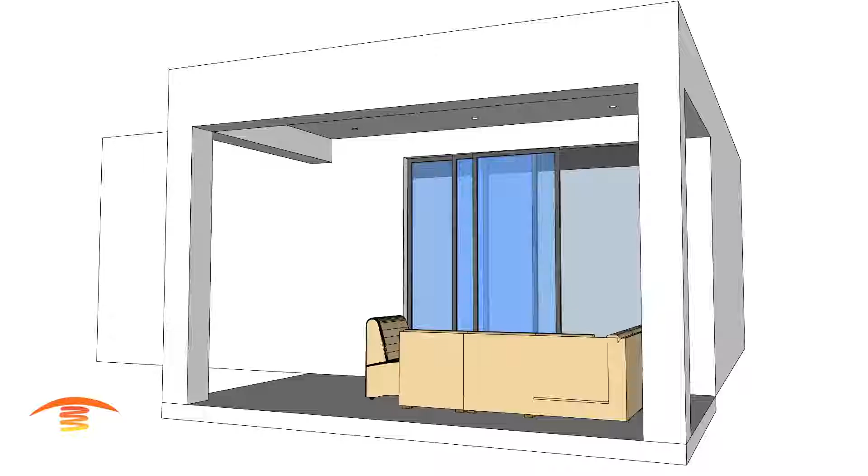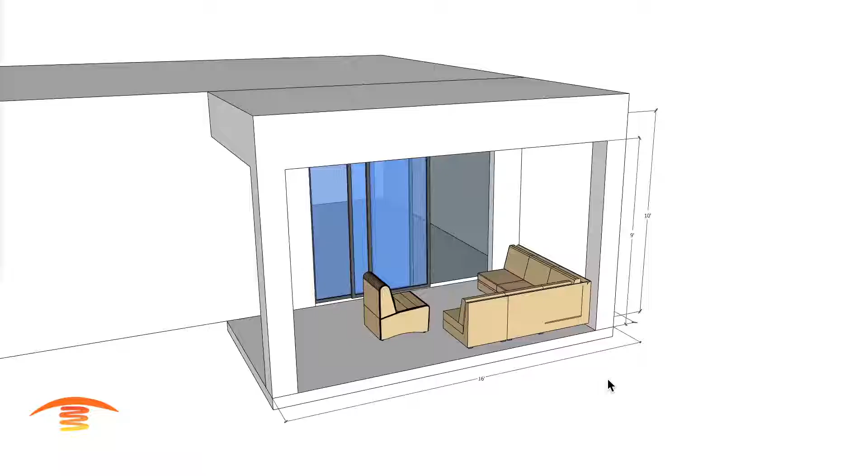Here we have a residential application. So this application, we're going to go ahead and look at the dimensions real quickly. And so I have a 10-foot ceiling height inside here, 9-foot edges over here. Total distance outside edge to outside edge is 16 feet by 8 feet 6 inches from the wall to the outside edge over here. And I think that's about it.

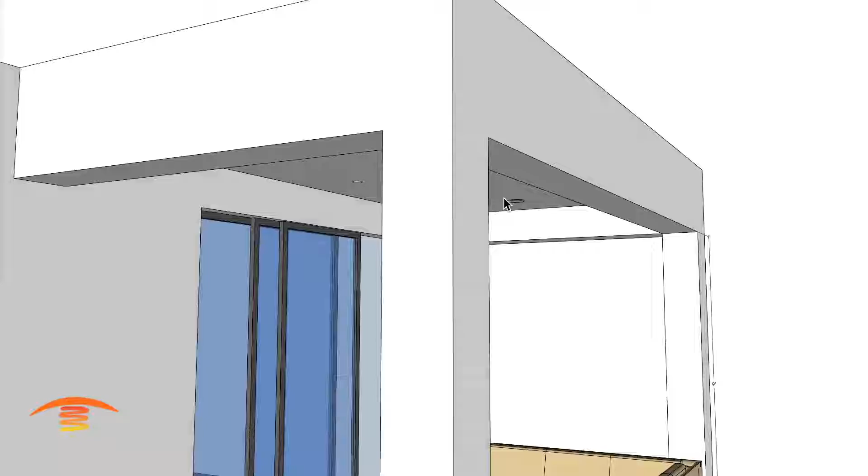We do have some can lights up here and some speakers that we want to be aware of. Also, the customer stated that they potentially might place a fan in here in the center. There is an outlet there for it already. And then of course we have sliding doors here. So let's just go here and look what that looks like here.

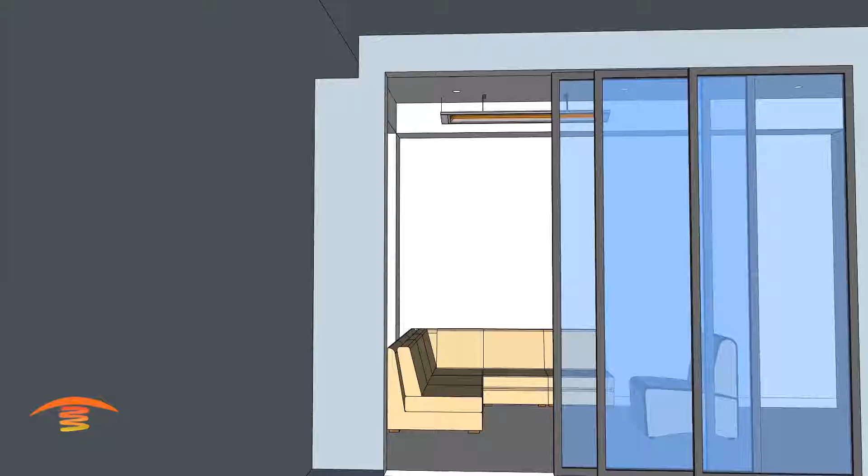So I just want to kind of throw this out real quickly, and here's one viewpoint of 2 units, and here would be a viewpoint of 1 single unit. And we'll talk about those in just a second. So let's go over here.

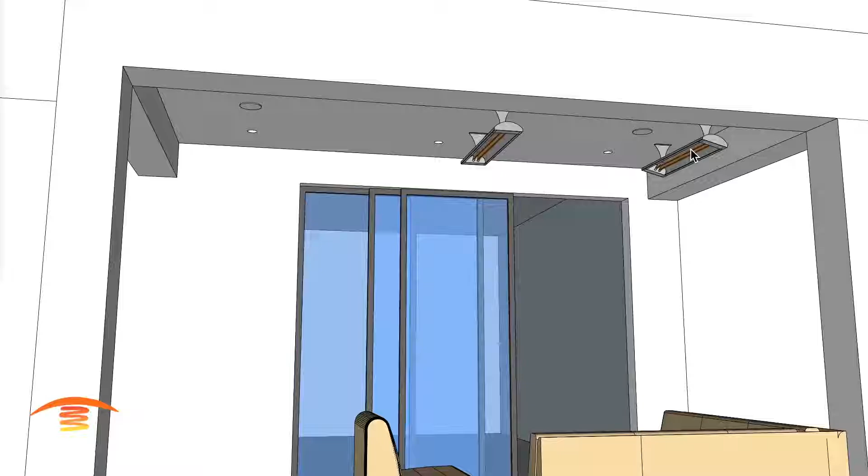All right, so first option I would recommend, and I know this isn't uniform, and that would eliminate the use of a fan in the center here as well. But these are the CD4024s, 4,000 watt 240 volt units. And the reason I have this is because I kind of like the way that this footprint of heat penetrates the seating area. It just has a more even flow throughout the space.

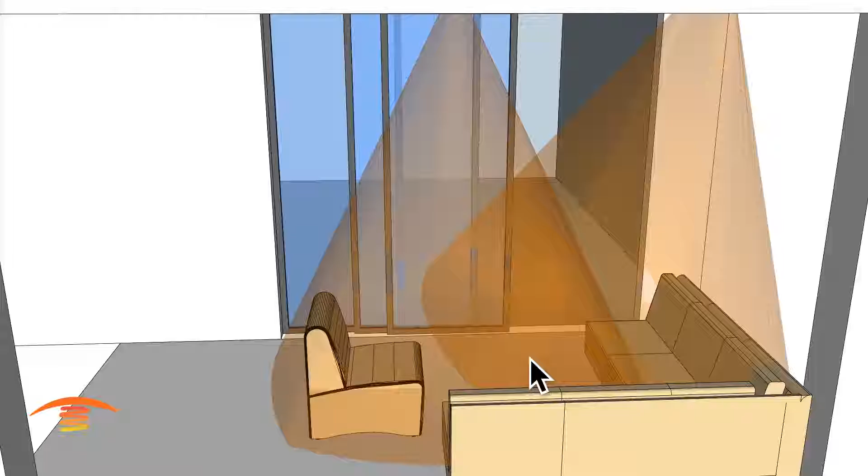Now I know that the customer, they also have a table here in the center, and we don't need to overheat that table obviously, but this just gives a better, more uniform heat throughout the space. Now, they did mention that they are the type of clients that would probably not need a whole lot of heat. So these could be reduced to a smaller unit.

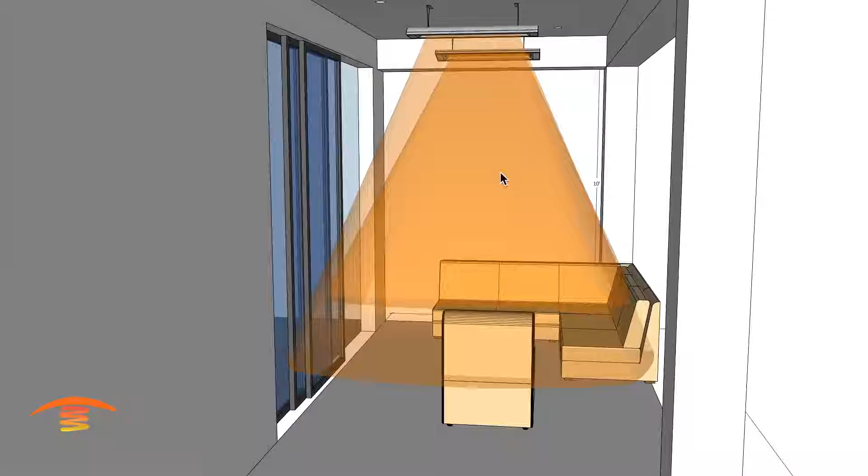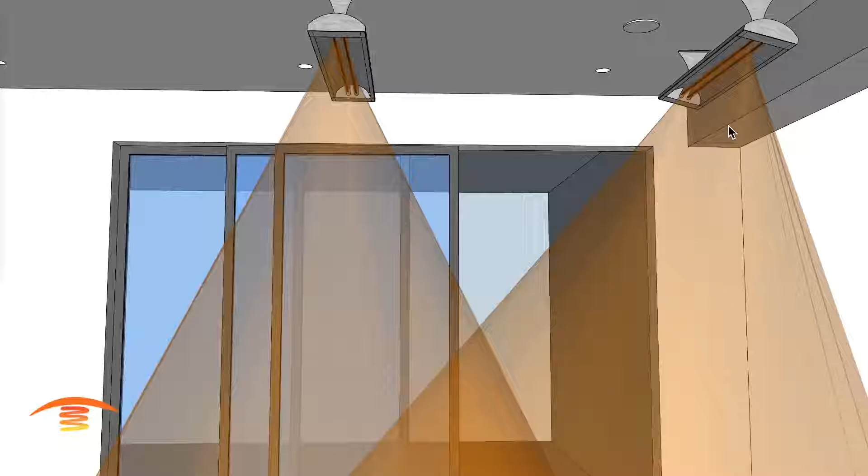However, I think you could always just turn one on, one off. Because they're dual elements, you could turn one element on, one element off, or 4 elements on, or 3 elements on. And that would give them a lot of flexibility without going to a whole control system.

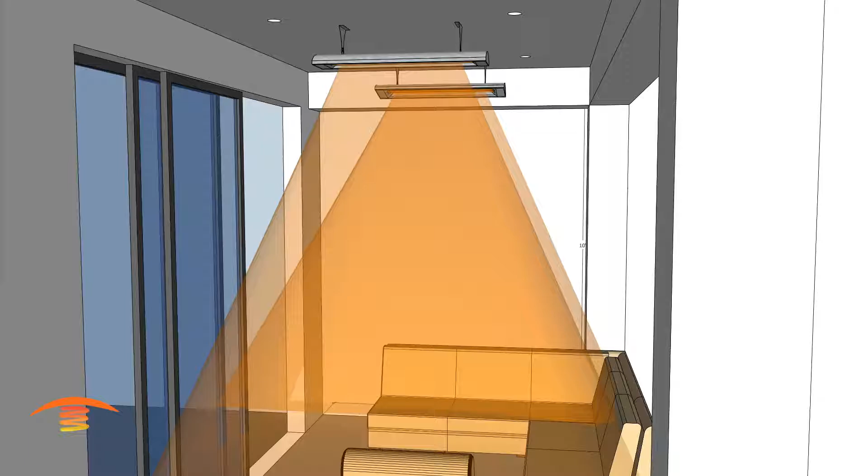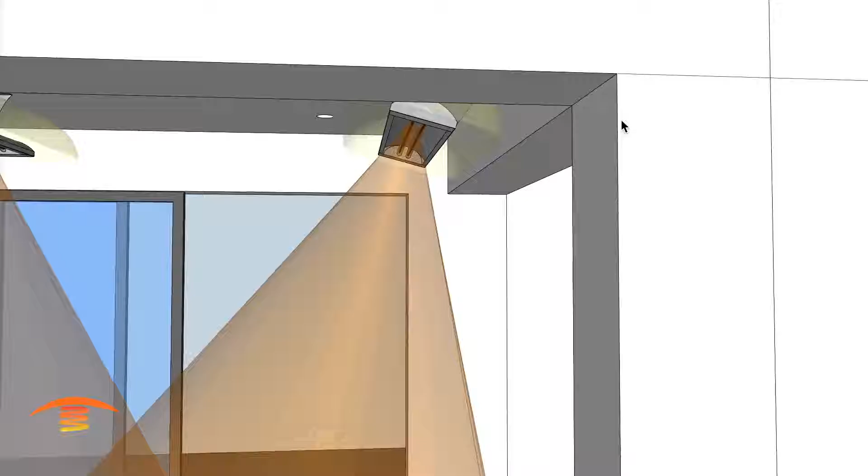So looking at the clearances here, you can see that I have met all the clearances to the bottom edge of the combustibles, and as far as the above clearances, let's see here, no problem there as well. There's 6 inches of clearance. And then of course with the angle here, I think this is a 15-degree angle. No issues with that as well.

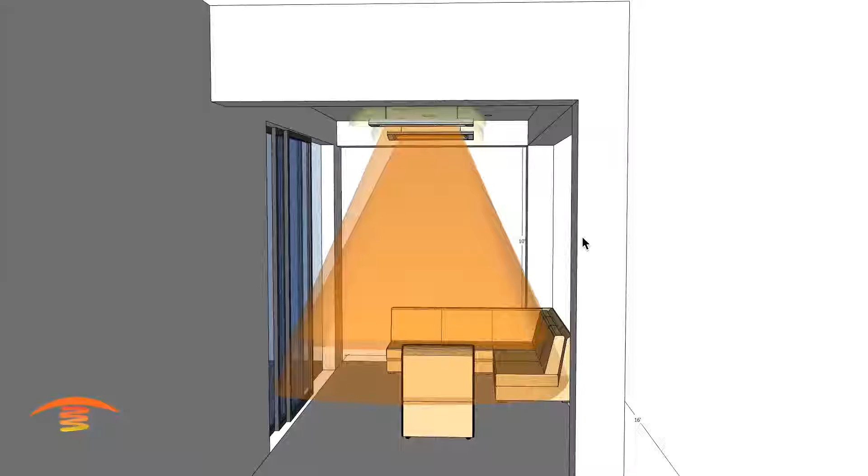I'm more than 6 inches away from this edge here. What I've done is I've placed the heater 6 inches, this edge 6 inches away, and then I changed the angle to that 15. So that gives you plenty of clearance over there. So that's one option there. And again, the only issue is with that future idea of a fan.

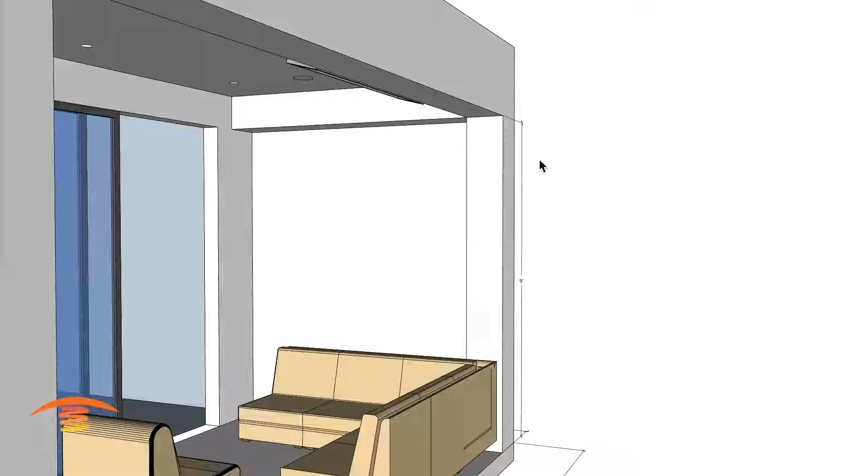So let's go to the second option, and the second option would be a 6,000 watt unit. Now a 6,000 watt unit is an awfully hot unit, but at a mounting height of 10 feet I wouldn't say that is overheating the space. And again, a dual element unit, of course you can turn one on, that would be 3,000 watts, and then for cooler evenings 6,000 watts.

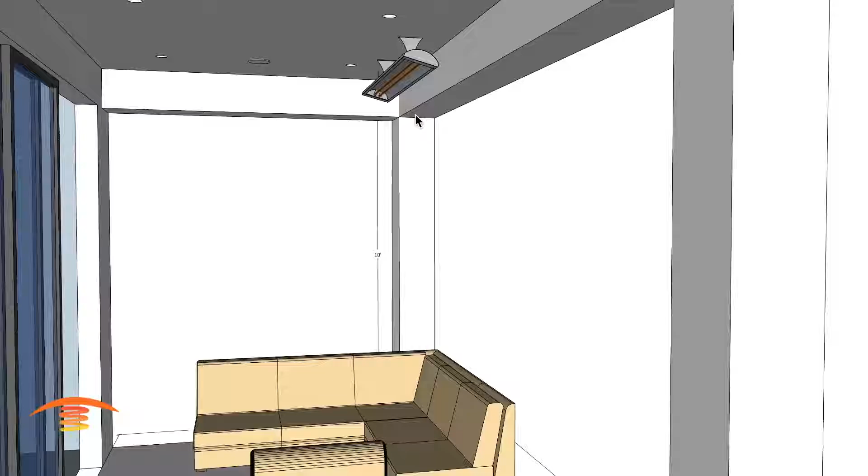And let's go ahead and look at the footprint of heat. You can see here with this type of seating arrangement, I think we're capturing most of this seating arrangement just fine. This would be a warmer spot, this would be a little bit cooler, and this over here would be a little bit cooler as well. And that would be one unit.

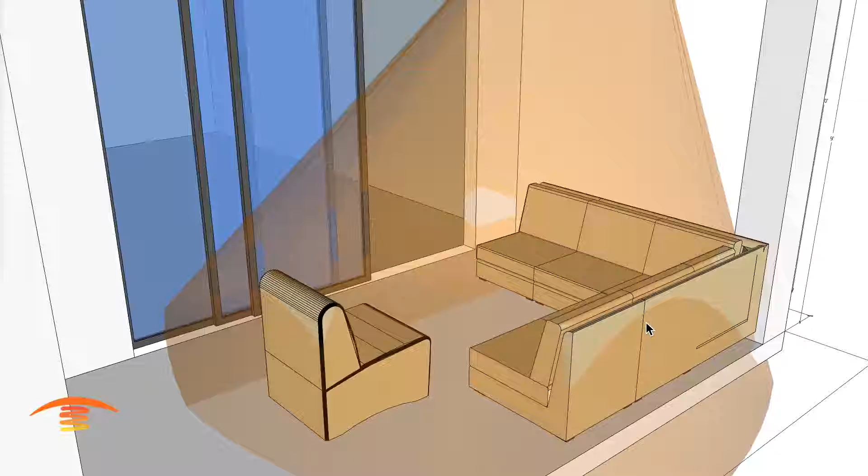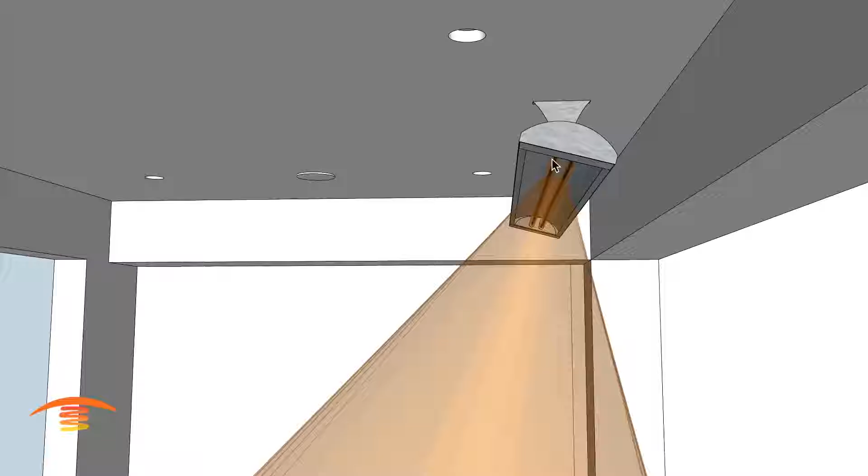Now they had mentioned using this 4,000 watt unit, and you could put a 4,000 watt unit here. However, I don't think a 4,000 watt would be hot enough for a 10-foot elevation mounting height, and that's my concern. Now, one other point I should make in the placement of this heater, I do have this at the 6 inches of clearance from this back edge. I did the same thing, mounted it at 6 inches, and this is true with the other option as well.

But the clearance below, you can see at 15 degrees, I'm just kissing this edge here with the bottom clearance. Over here it's not a problem, but over here we probably need to go to 16 degrees of tilt. And that still is fine. I just have it at 15 here.

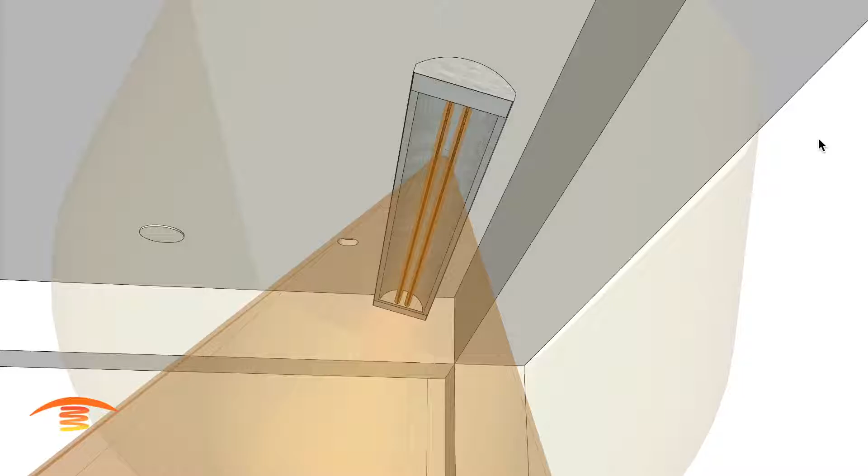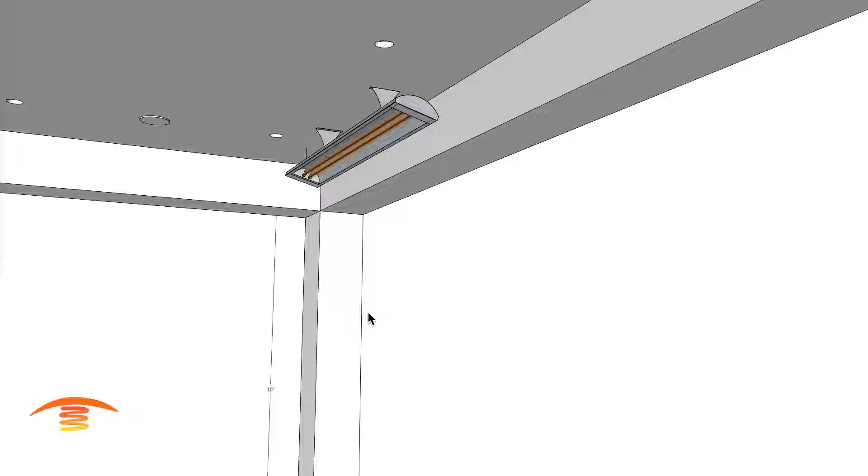But the other issue I wanted to address is the fact that I think I have this at 18 inches off the wall here, so that might be an issue with the lights and the heater. You want to make sure that your heater is not blocking the ray of the light itself. So there are, like I said, can lights up here, and you want to make sure that they're still functioning properly. So anyways, there's 2 different options for this patio.

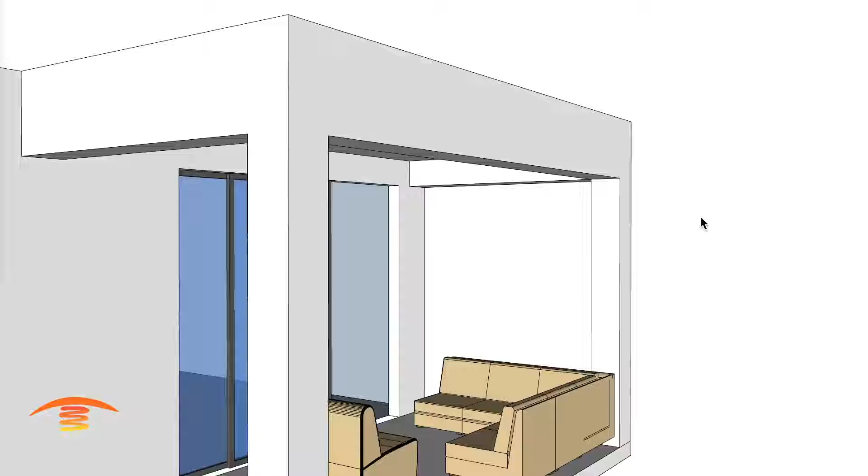You could put a gas heater in here, however, it would come down much further, and you would need to make sure that the exhaust gases are vented out of here, which would create another issue. You'd have to put some sort of venting in there, and so I think the electric option for this particular application is the best choice, and I hope the customer sees that as well.